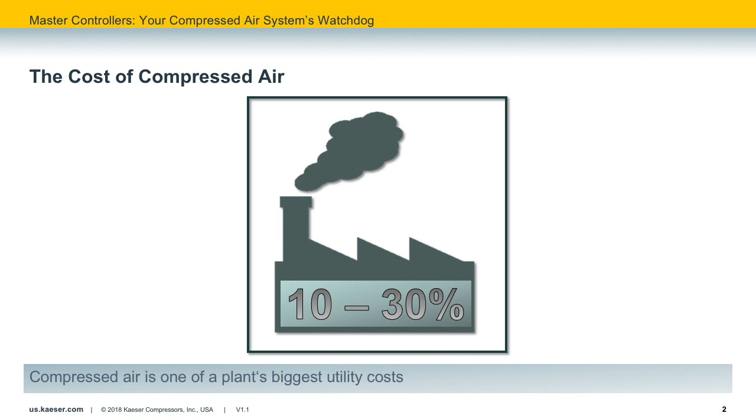The U.S. Department of Energy conducted a survey and determined that for a typical industrial facility, approximately 10% of the electricity consumed is for generating compressed air. For some facilities, this is as high as 30%. Compressed air is often a critical part of production, and without it, the plant may not be able to operate. So not only is compressed air expensive to produce, but it can also be very expensive for plants when their compressed air system is offline for any reason.

If compressed air is that expensive to generate and that critical, shouldn't it be carefully managed? Better yet, wouldn't it be best to have someone or something watching and monitoring it continually to ensure energy efficiency?

Today we'll talk about the problems that can happen when a typical compressed air system isn't properly controlled. We'll also talk about the benefits of a properly controlled system, as well as how a master controller functions, how a master controller can impact system design, and finally, system design parameters you should be aware of.

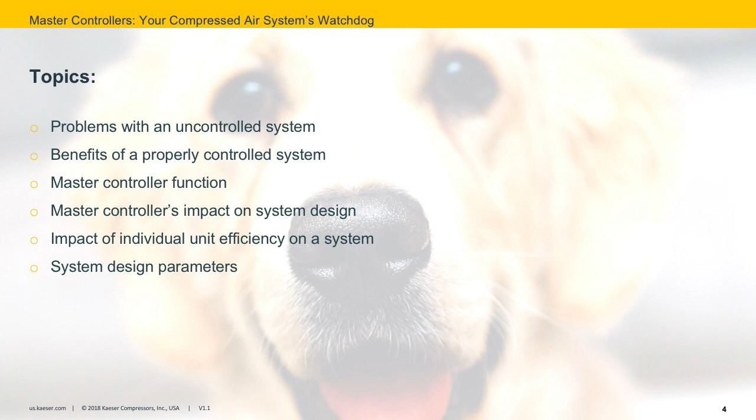In a typical plant, there are multiple units feeding the compressed air system. This can be a significant advantage, as with multiple compressors, there is the possibility for redundancy. If one compressor is offline, then a second or a third, and so on, can run to at least keep the plant in a productive mode. With only one compressor, if that unit is offline for any reason, the whole plant could be shut down.

The disadvantage of having multiple compressors operating the facility is how well are they operating together? Each compressor will have an individual controller or logic regarding its own operation, safety, startup, etc. However, how do these individual compressors talk to one another or play well with one another?

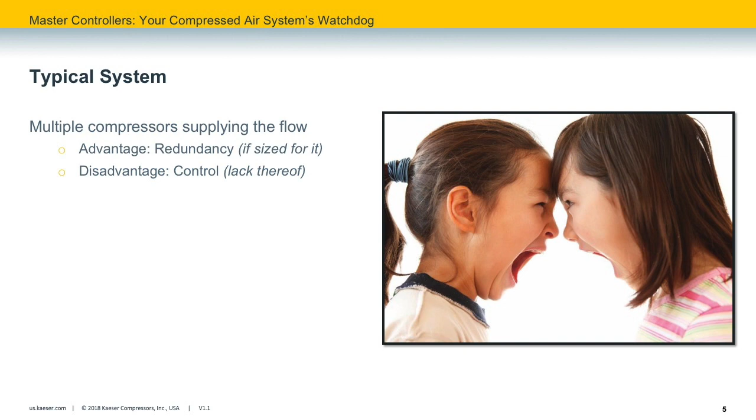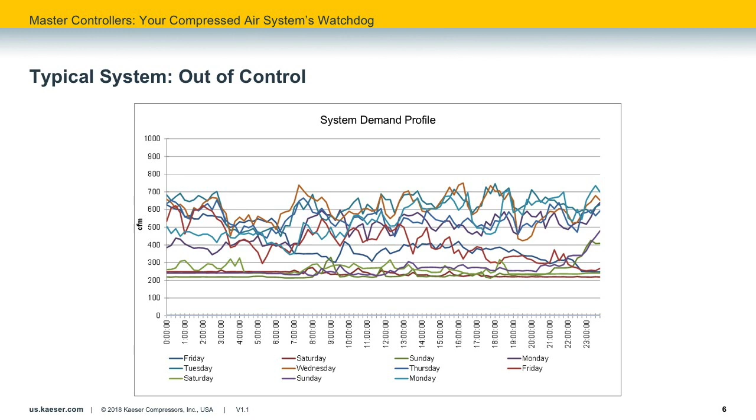On top of having multiple compressors supplying the flow, most systems don't have a steady airflow demand. Here's a typical example. This graphic doesn't necessarily mean the compressors aren't operating the system efficiently, but when you have various demands on varying shifts, how do you make sure that the most efficient compressors are actually operating? Without a master controller, there tends to be uncontrolled compressors cycling, trying to meet these demands, which creates excessive wear and tear on those particular units. In addition, this leads to unnecessary pressure drop in the system, which can further affect production.

Let's take a look at how a master controller affects a sample system. In this case, we've got two fixed-speed compressors, which are load-no-load compressors with a time-stop feature, and they're different horsepower as well. These are compressors A and B, shown off to the left. Compressor C is a variable speed, also called a variable frequency controlled compressor. Their individual flow profiles are shown in the left-hand graphic, all running independently of one another based on the input from the master controller.

When we combine all three compressor flows in the middle graphic, we see how the master controller chooses which compressor to run. This is actually based on the operating pressure in the dry storage receiver, which is the third graphic, called the storage vessel. In most cases, a master controller will be adaptive and load and unload compressors based on activity in the facility, which affects operating pressure at this dry tank.

Taken together, we get the total demand, which is the last graphic on the right. Notice the relatively stable operating pressure at the storage vessel graphic, but the varying flow profile in the total demand graphic. So that's what we would expect with a master controller: stable operating pressure with a fluctuating demand, and all the machines operating very efficiently.

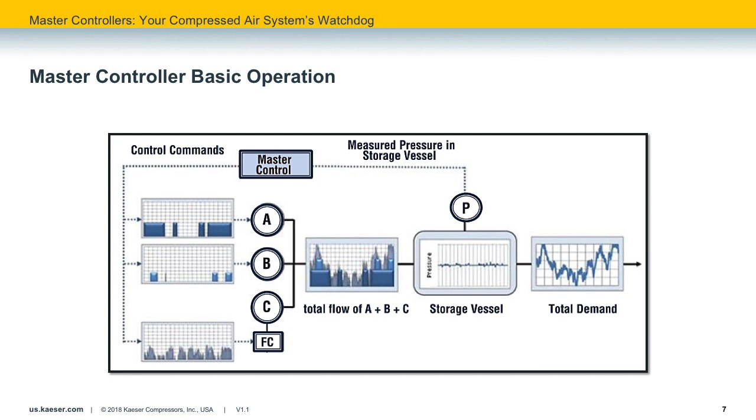We've talked a little bit about varying demand, as well as a breakdown of system operation with a master controller, but to really appreciate where we've come now in 2018, we should really look at where we've been.

Prior to master controllers, and even today without a master controller, cascading pressure bands with multiple compressors is still an accepted practice. The end goal of cascading pressure bands is to ensure that all of the compressors don't load or start at the same time. If that happens, your plant could have a huge demand spike or charge on your energy bill each month. By introducing a sequencer to cascade your compressors, it can regularly change which compressor is first on, last on, etc.

So therefore, you can start to balance the load hours. In the end, because of this larger pressure band, this allows the baseline compressor to run at an elevated pressure, which increases overall energy costs, which we'll get to in a little bit.

Notice that the overall pressure is almost a 15 psi swing, and this is just at the control point. It could be even larger downstream in your facility. And really a 15-pound band with 4 compressors is probably a little bit light. I would expect to see that maybe more like 20, maybe even 25. Also note that the red line at the bottom represents the minimum acceptable pressure in the plant.

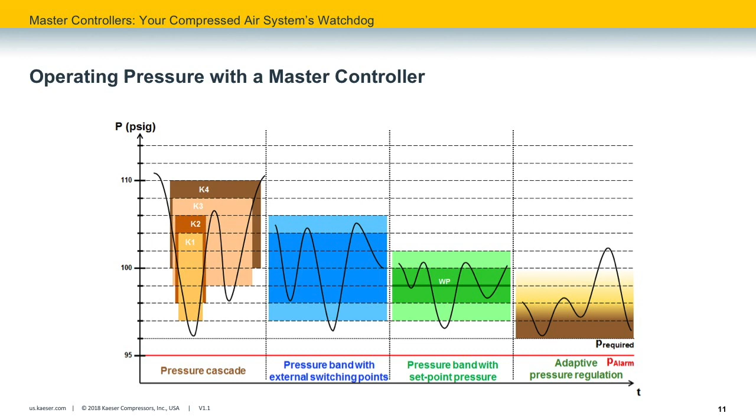With these type of master controllers with adaptive pressure regulation, the master is looking to, number one, meet the fluctuating demands while maintaining critical pressure, but also, two, obtain the maximum efficiency of the system. In some cases, during low production periods, it can be more efficient to allow the pressure band to widen. So that's what we see at the right-hand side where the pressure comes all the way up, thereby cycling those compressors on the off shift a lot less than it would be to maintain a lower plant pressure. So there's a benefit between pressure and also cycling, which we'll talk about a little further.

So far, we've discussed the first two items, improved pressure stability and also increased system efficiency. If you can recall the slide with the two children screaming at each other, then you'll understand the reduced maintenance cost and enhanced preventative maintenance topics. Additionally, the benefits for a master controller include minimized waste as well as the master controller's IoT capabilities.

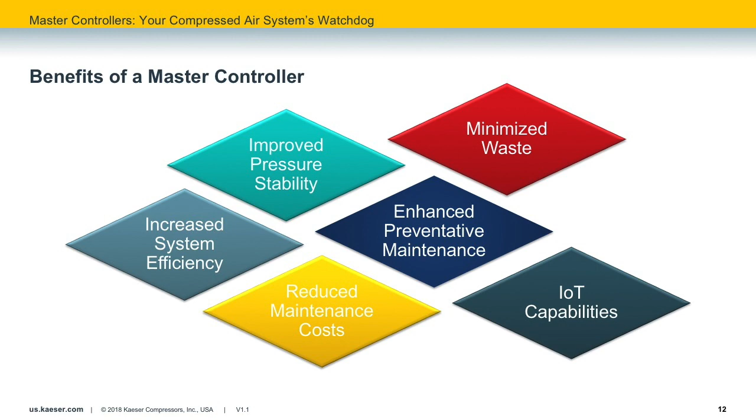So let's break it down a little further for each of these points. Remember, we looked at cascade pressure control, which had as high as a 15-pound pressure band, and if you'll remember, I said it could even be higher depending on how many machines you have. Many pieces of equipment require a stable operating pressure at the point of use, and this can be accomplished via local filter regulator and lubricators, also known as FRLs.

However, if these lines aren't regulated and pressure is too high or too low for a particular piece of equipment, the product quality could suffer, or this could increase product scrap. Further, maintaining a lower, stable operating pressure reduces compressed air waste, which we'll talk about on the next slide.

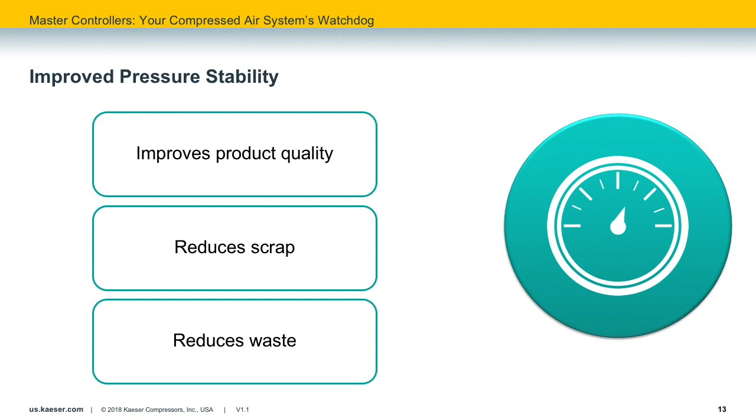In most compressed air seminars, you'll hear a reference to the Department of Energy's review of compressed air systems. Specifically, 45 to 60% of all compressed air generated is used for production, but the remainder is wasted energy. So how do you curtail these wasted energy items?

By reducing plant pressure, that's the easiest way to do it. This can be accomplished with a master controller. The major factors of waste are artificial demand and leaks, which are directly affected by pressure. Inefficient or inappropriate uses are not affected by pressure, so that's the other factor of waste.

By reducing plant pressure, the amount of air being used is going to be reduced. At elevated pressures, all your demands are going to use more air, so leaks are going to leak more at higher pressures than they are at lower pressures. Drop the pressure, and your leak will leak less.

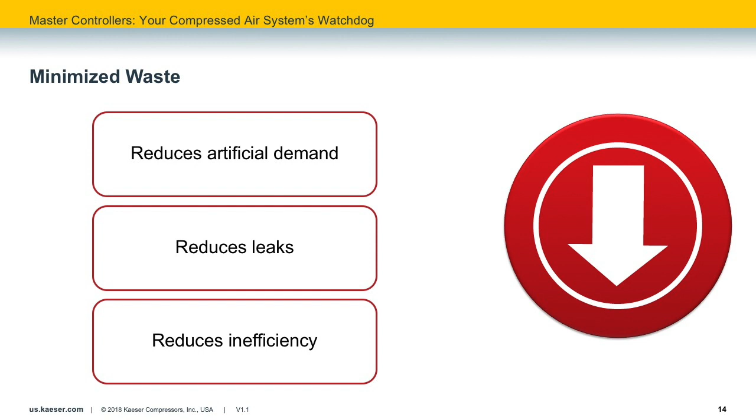That's artificial demand. We'll talk a little bit more about the monitoring functionality of a master controller later, but monitoring flows over time can also help you get a handle on your plant's leak rate. Finally, a master controller can reduce system efficiency, which thereby reduces wasted energy in your plant. I said reduce system efficiency, but it's more like improve your system efficiency, so less waste.

If you've purchased a compressor, you might have heard that over 70% of the life cycle cost of a compressor is going to be energy. The balance, which is purchase price and maintenance costs, those are evenly split.

Understandably, you'd choose the most efficient compressor, but what if you had older compressors in your system? How can you maximize system efficiency?

A master controller should minimize the number of cycling compressors in your system. Typically, there should only be one of these compressors. This allows for other larger compressors to run fully loaded for longer, maximizing your compressor duty cycle.

Ideally, baseload compressors should have close to 100% duty cycle, meaning there is little to no time spent idling, which would be producing no compressed air to the plant, but your motor is actually running.

Further, as hinted in the last slide, reducing plant pressure to the lowest point possible will not only reduce your artificial demands, but also reduce the compressor generation pressure, which reduces overall energy cost.

One of the rules of thumb that we like to talk about in the industry is for every 2 psi pressure drop, it's equivalent to a 1% energy reduction. This is also the case if you say 1 psi is worth 0.5% in your energy cost.

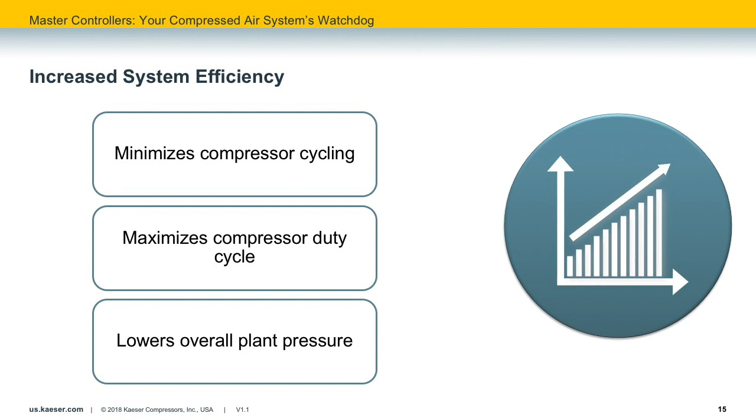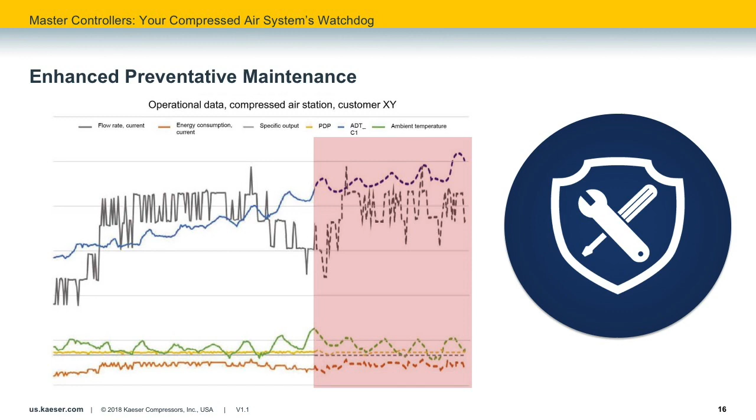Internal compressor controllers have enhanced capabilities, but we're asking them to do more and more with each new iteration of compressors. A master controller should have the adaptive pressure control like we discussed previously, but in the near future could have the ability to note potential service issues based on real-time data like we're seeing here.

This is one of my favorite slides. I'm often asked, what's the most important data point to measure in a compressed air system? Well, most of us aren't measuring anything. And when there's a problem in the system, we'll address it immediately. So we're reactive rather than preventative, like we talked about in the last slide.

So how do we become preventative? We've got to measure the system and interpret that data.

These are just some of the items that I'd recommend monitoring: alarms, general compressor operation, system pressure, and that's just system data. What we found is the reporting feature from a master controller showing system efficiency and system operation are really powerful tools for plant engineers and plant managers to associate compressed air to your cost of production.

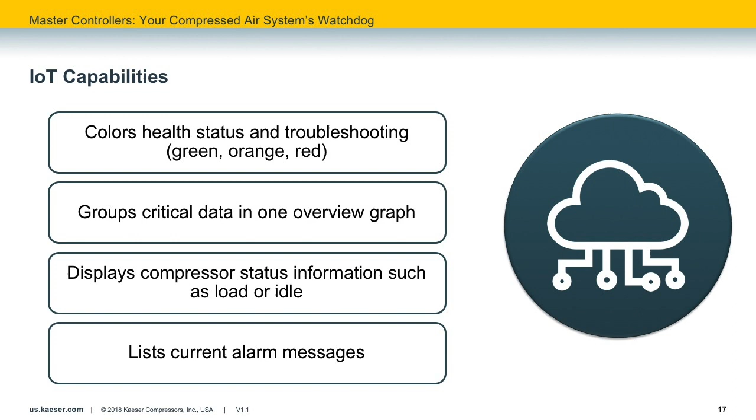Without a master, we can have multiple compressors fighting each other, loading and unloading often based on other compressors' operation, so machines fighting each other. This increases maintenance costs of all your compressors. Plus, without a master, you can have additional compressors online for no reason, simply idling. We talked about that a little before.

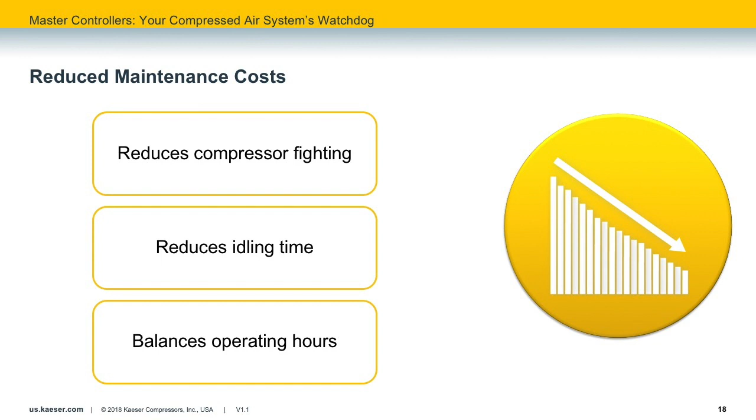This is going to increase your maintenance costs because maintenance costs are based on service hours. Introducing a master to the system can balance the service hours on like-sized compressors, which can allow your compressors to be put on the same service schedule, or eliminate machines that are online when unnecessary. So that's a big boon and can save trip charges as well.

That lifetime is anywhere from 5 to 10 years. I've been in the compressed air industry about 14 years now, and I continue to see equipment that's been installed for 10, 15, 20, even 30 years. So those lifetimes are different depending on what your considerations are. Also, if that solution offers you no redundancy and you can't afford downtime, it could cost you dearly if there's any kind of repair. So those are things you need to look at when you're designing or redesigning a system.

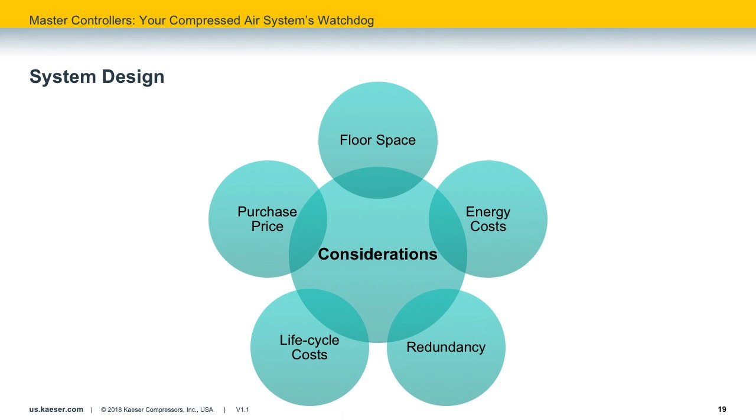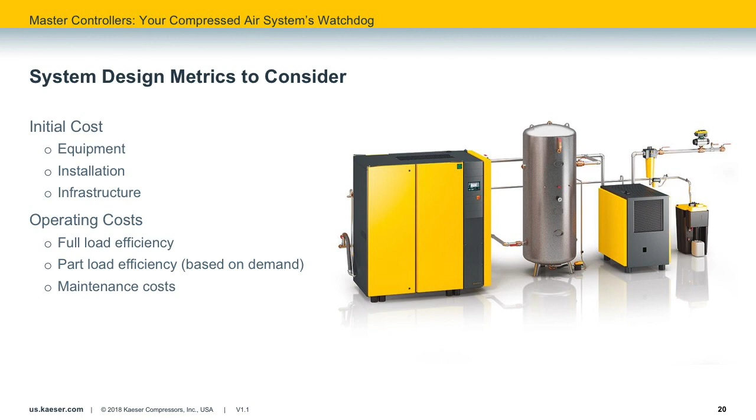So how do you compare various systems? And then what's the best way to design a system?

Let's first look at an installation with a single compressor. Many facilities consider one compressor for operation, and that's still common today for sure. In this example, we're talking about a single fixed speed compressor, which has a lower capital cost compared with a single variable speed driven, or VSD, compressor—often referred to as a variable frequency drive compressor, depending on the manufacturer. Single compressor installations are typically the lowest capital cost compared with multiple compressor installations, and that's pretty advantageous, especially when you're working within a budget.

However, one thing that always comes up in any system design is the cost of backup or redundancy. In everyday life we say don't put all your eggs in one basket. I know it's cliche, but it's the same with your compressed air system. In most cases, two eggs are better than one in case one breaks down. With a single system design, the cost of a backup compressor is equal to that single compressor. So those are things you have to think about—if your compressor is $50,000 and you want a backup, that's another $50,000 procurement.

But if you had a split system, it would be less. Further, comparing a single fixed speed compressor to a single VSD compressor, the VSD compressor is going to have a higher overall purchase price.

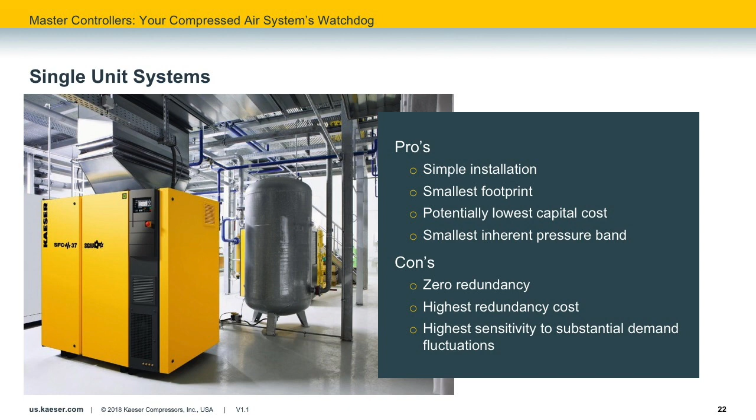A simple alternative to the single compressor station is to consider 2 fixed speed compressors, each rated for 50% of the demand. Notice the pressure band increases slightly so that we could cascade the units, so both units aren't loading and unloading together. Remember that graphic we looked at originally with the pressure bands?

This can be accomplished a multitude of ways, either via pressure settings on each machine to master-slave between the 2 compressors, or via a master controller. Again, with the master, you can get down to probably about 7 psi.

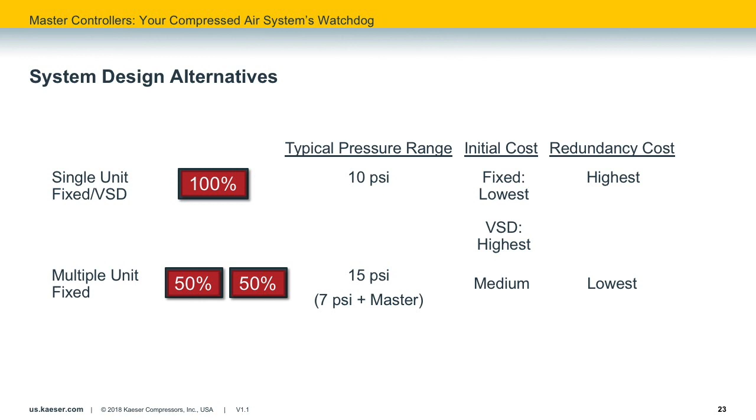While the capital cost for a multiple compressor system is going to be higher than a single compressor, instead of adding a 100% compressor for redundancy, we can consider a third 50% compressor as backup. So overall, that purchase price could come down. Therefore, redundancy is going to be a lower capital cost to add.

The big benefits of the multi-fixed speed compressors is, again, that lower cost of adding redundancy. This also provides better efficiency at lower demands than a single fixed speed compressor. You'll see that in some graphics later on as we get to it.

Depending on the control range of the single variable speed drive compressor, it could have a comparable efficiency at those lower demands as well. Maintenance intervals, again, are traditionally based on service hours of the compressors.

Therefore, if we have multiple smaller fixed speed units, we can stretch out the operation, balancing the service hours between all the compressors. This typically results in more predictable service intervals, with all 3 compressors, or as many as you have there, coming due at the same time, saving multiple trips.

Like we already talked about with a master controller, balancing service hours can go a long way in saving the plant on maintenance costs. The multiple fixed speed compressor installation will typically require more physical space at your facility.

It'll need more utilities, power, water, etc., if you have water-cooled machines, and infrastructure, piping. With more compressors, the overall project will typically cost more.

This scenario also has a higher potential pressure band, again, due to that cascading of the compressors. Our example was 15 pounds.

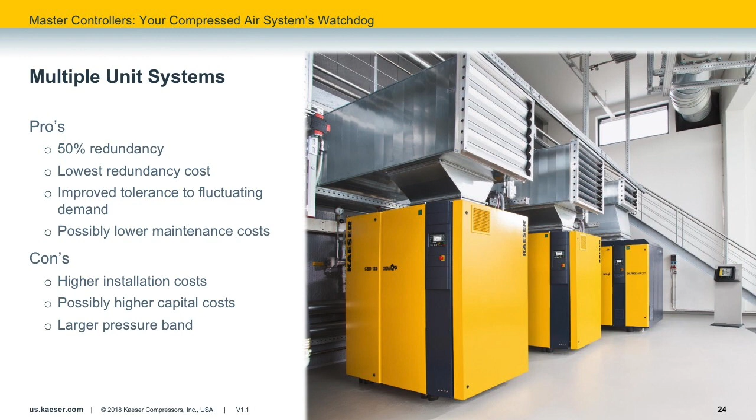Lastly, we'll look at a split system with a variable speed drive compressor. This is representing about 60% of the overall demand, and it also has a smaller fixed speed compressor, which is representing about 40% of the overall demand.

The pressure range is again about 15 psi, to ensure that both compressors aren't loading and unloading together, which of course would defeat the purpose of having multiple compressors handling the demand.

This is going to require a slightly larger fixed speed compressor as backup, so redundancy, hence the medium redundancy cost designation. You'll also be looking at a medium installation cost designation, as variable speed compressors are, again, more expensive than their fixed speed counterparts.

By adding a master controller here, you can further reduce that pressure band. Additionally, a master controller will ensure that the VSD always runs as the trim, and that the most efficient compressor, or combination thereof, will be operating at any given time. So again, a great opportunity for a master controller there.

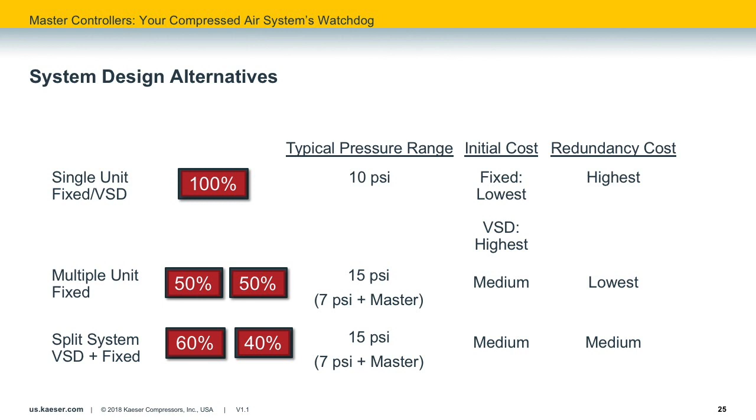The goal of any system design is to maintain the best possible efficiency over the entire demand range. We often see facilities scale up or down quickly without the ability to procure new compressors. Facilities sized in a stepwise or split system design are able to maintain their efficiency levels closely regardless of demand, especially when they already have a master controller.

One large variable frequency drive can have a huge control range, but at lower flows the efficiency level is reduced. If the single variable speed compressor spends significant time at that low level, energy savings could be significantly reduced, and you could see increased maintenance costs, unexpected downtime, and shorter lifetimes of your variable speed unit.

Additionally, systems with a master controller can provide necessary monitoring and reporting, remember that IoT we just talked about, as well as operate your station as efficiently as your design allows, therefore reducing your energy costs, waste, and stabilizing your operating pressure.

We'll spend a little time discussing control range next, but when using the split system design, sizing the VFD/VSD compressor at 60% of the demand and the fixed speed compressor at about 40% of the demand will fit within the VSD's control range.

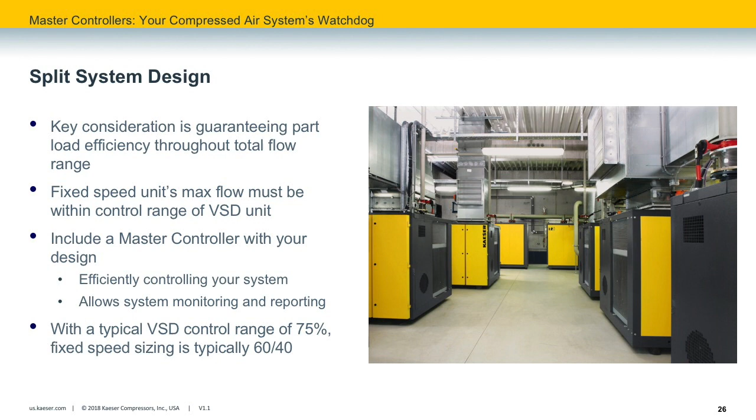So we'll talk about control range here. In this example, we take a 1,450 CFM VSD compressor. It's got a minimum flow of 625 CFM, which is only a 43% turndown. It varies based on the machine, how far you can go. In a lot of cases, you're down to 22, 25%. In this case, it's only 43.

Below 625 CFM, the VSD compressor is going to run load and unload, which will be less efficient, and it's going to generate a fluctuating pressure, which you shouldn't see with a VSD in the first place.

Also, if there was a same size fixed speed compressor, again 1,450 CFM in the plant, what happens when the plant needs more air than the VFD or VSD can supply? So if we needed 1,451 CFM, but we're only supplying 1,450 CFM, that same size fixed speed compressor is going to have to load. So you'll have another 1,450 CFM online for just one additional CFM. You're increasing your supply significantly.

So the system is going to hit the unload pressure of both machines typically really quickly. Usually in this scenario, we see both the VSD ramp up and down at the same time the fixed speed compressor is loading and unloading. This can occur all the way until the demand exceeds the VSD's minimum speed, in this case 625 CFM, plus the fixed speed's rated output, which is that 1,450 CFM.

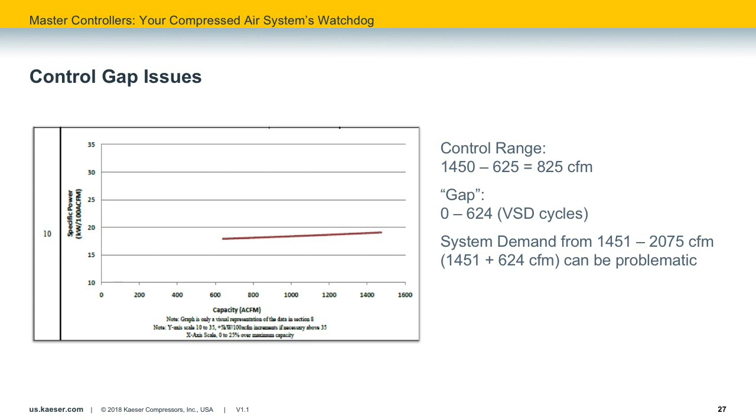A split system design will typically be the most efficient at all demands, and it can provide for redundancy should the VSD be offline for any reason. It's typically going to be a lower capital cost than a single VSD system, just based on horsepower. Alternatively, the split system design will have a higher capital cost than a 100% fixed speed compressor, or perhaps multi-unit fixed speed compressors. And the cost of redundancy with the split system design is going to be higher than a multi-unit fixed speed compressor, but lower than a single VSD.

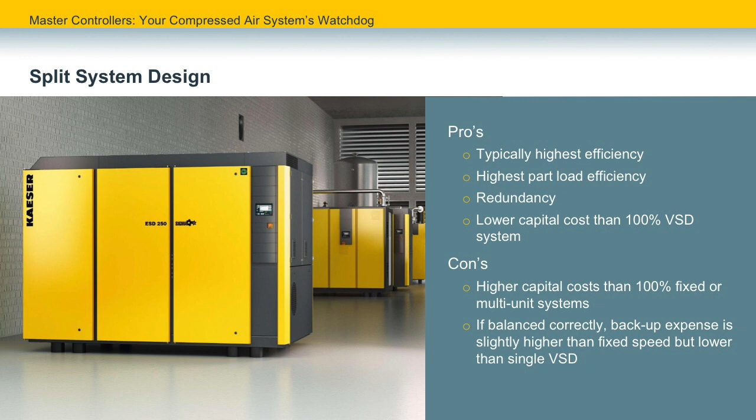Now that we've talked about the pros and cons of various station designs, let's talk about how multiple compressor systems can be even more efficient. These are items we've already discussed, but we'll highlight them once more.

We've mentioned the cascade pressure band. This is going to result in higher average pressures, which results in higher operating costs. Remember, 1 psi is equal to about 0.5% more input power. This also results in higher artificial demand, so your leaks will leak more at higher pressures, and your tools will use more air. Roughly translated, 1 psi equals about a 1% increase in demand of all unregulated uses.

Not only that, but remember that control range discussion with same size VSD and fixed speed compressors? This typically happens with multiple compressor rooms that lack any external controls. The compressor internal controls drift over time, and the units start to load and unload much closer than intended, and you may now have two compressors cycling in two different rooms versus just one. Obviously not what you'd want. That significantly increases power consumption and will also affect the lifetime of the compressors from a wear and tear standpoint.

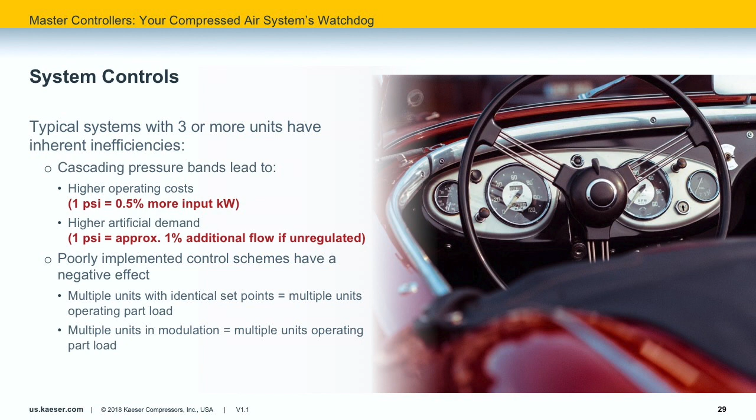Flow controllers are a useful tool in the field to drop the network pressure to the lowest possible level. By doing so, this addresses the artificial demand issue, because now you're regulating to the distribution piping if you have unregulated uses. So instead of having 110 psi, you might have 90 psi or 80 psi, because the flow controller is going to regulate pressure to that distribution piping.

In systems where there are or were multiple modulating compressors, a flow controller was a great way to reduce overall energy consumption. However, often the generation pressure, at the compressor discharge, must remain at a higher level to create needed buffer for the flow controller to actually work. Typically, that's about 5 to 10% of the inlet pressure. The flow controller doesn't control the compressors at all, only that downstream pressure. So we aren't capitalizing on improved energy efficiency of the compressors.

Now, there are cases where a flow controller can work really well with that needed storage buffer. So if you have high intermittent demand events that would take the entire system down, or would turn on a third, fourth, or fifth compressor, by having a large storage volume and operating at a higher pressure, then using the flow controller to deplete that storage volume, you can keep off that third, fourth, or fifth compressor, which can really save you significantly on demand charges. However, you're still going to pay for the generation charges to create that storage volume.

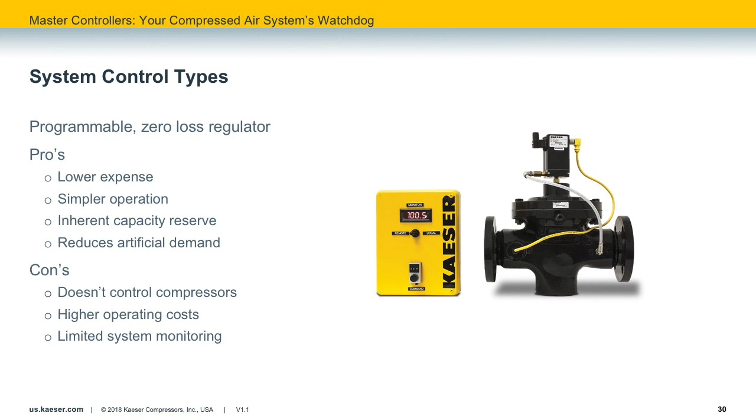With a cascade pressure already established for our three examples and the needed reserve buffer in a storage receiver, plus a little bit of differential for the flow controller itself of at least 2 to 3 psi, which will vary by manufacturer, we have a total differential pressure from the compressor discharge to after the flow controller of between 17 and 28 psi.

Wow, just incredible to look at that number. That's a very large pressure swing to consider.

So is the downstream pressure set point of the flow controller low enough that we can effectively run the flow controller and not overpressurize the compressor? So that's a big question.

So what addresses some of the misgivings of flow controllers? And before we move on, I'd like to say that there are some really good applications for flow controllers. If you're trying to build a buffer, keep some of your machines offline until you have a big demand event, then a flow controller can be a great thing. And like we say here, if you can handle the larger pressure band and the larger generation pressures, maybe keeping compressors off is the way to go. But in most cases,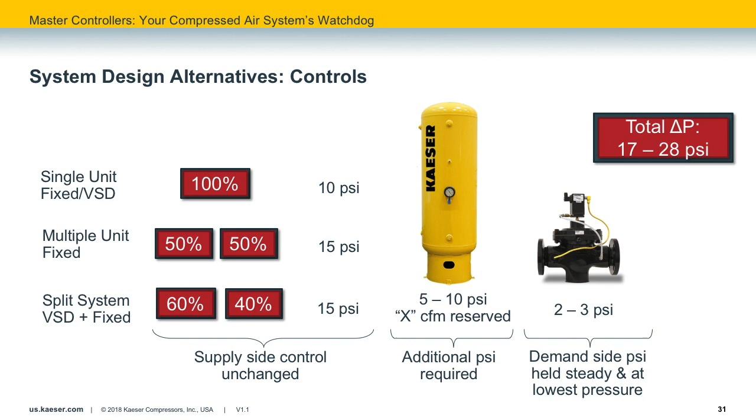we won't see that. So as discussed before, a master controller can address some of these issues, and it's going to be able to coordinate all your compressors within the system. Newer master controllers on the market are based on algorithms that consider rate of change calculations versus simple pressure band controls. So it's learning the stations and making simulations for the most efficient operation.

When a master controller is installed and there are multiple smaller compressors, efficiency can be optimized, resulting in lower operating costs. Master controllers also can be accessible remotely and stream data and messages to plant operators in real time, which brings us back to that IoT or Industry 4.0.

When compared to flow controllers, master controllers are generally more expensive and can have significant installation costs. And they don't have explicit reserve capacity like a flow controller creates. So those are some pros and cons and comparisons.

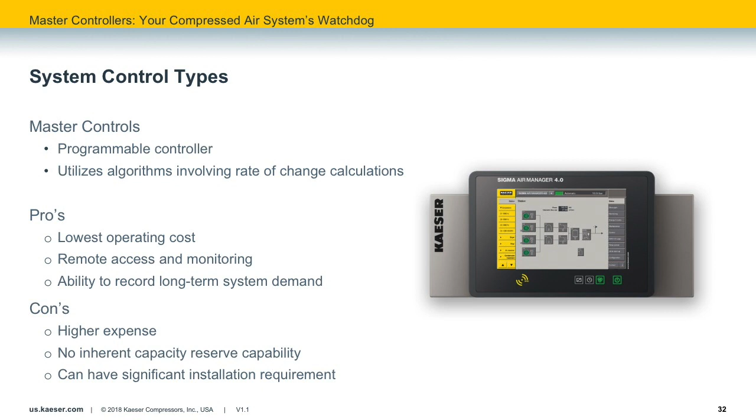However, rather than that total of, remember what we showed, 17 to 28 psi possible, a master controller is typically going to work with a 3 to 7 psi range, and that can vary depending on what machines you have, depending on how much storage you have, and so on.

Could be larger than 3 to 7, again depending on increasing the pressure. Remember, anytime we're increasing the pressure, we're increasing the generation cost. Every 1 psi is equal to 0.5% in energy increase or likewise decrease. So it's better to supply your airflow at the lowest possible pressure, which is going to allow your compressors to turn off and shut down, saving energy. You'll see that with your master controller by managing your machines. The other large benefit of a master controller is having everything on one pressure band so that you're not fighting one another. That's how we're able to accomplish that 3 to 7 psi.

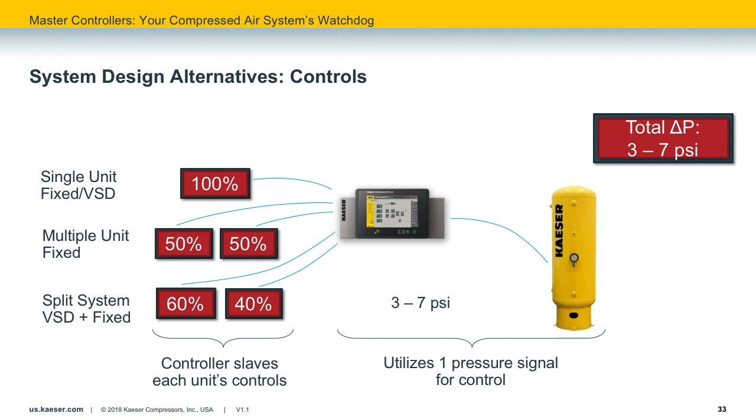Getting back to the sample systems we talked about: single VFD, single fixed, multiple fixed speed units, and then the split solution, 60% to 40% VFD to fixed. We'll give some real-life examples here with one 250 horsepower VFD, one 250 horsepower dual control or fixed speed machine, which is a load/no-load compressor with a timed-stop feature, and then two 125 horsepower dual control or fixed speed compressors. We'll refer to that as a split solution, as well as one 125 horsepower VFD and one 100 horsepower dual control or fixed speed, again referred to as a split solution.

So how do they compare efficiency-wise over the course of a typical demand profile?

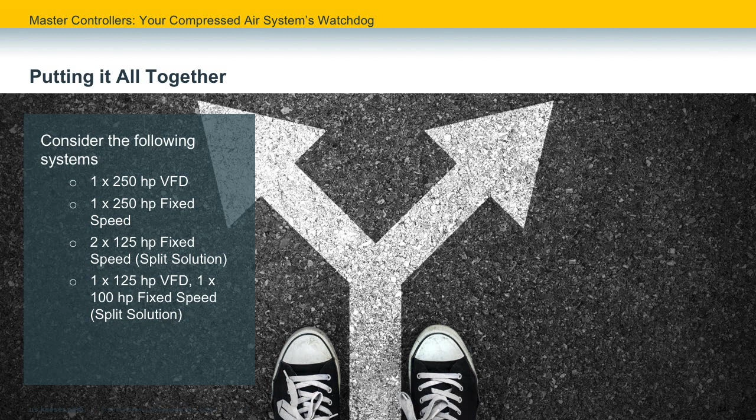Remember, we talked about budgetary numbers. Budget was really important. We want one machine - that's the only thing we have available. Well, if you run really 60% or below, you could be really wasting energy. Not only that, but it's an application-related issue, and you can have service issues down the road. So that lifetime we talked about, is it 10 years? Is it 5 years? You're probably looking at a lower lifetime as well. But at the higher level, if your single machine is going to run at those higher levels, anywhere above 600, the single fixed speed compressor is becoming more efficient.

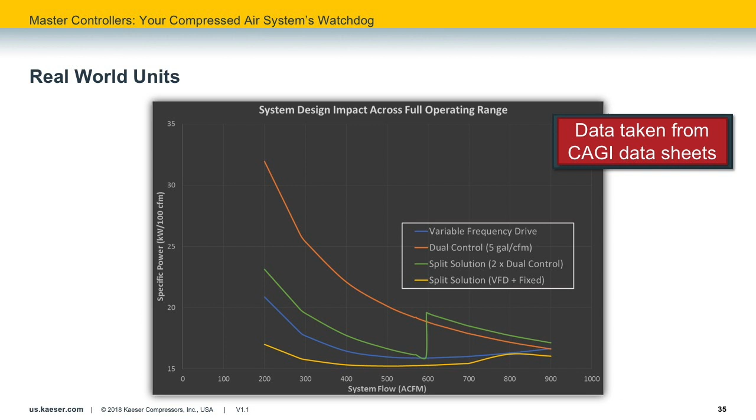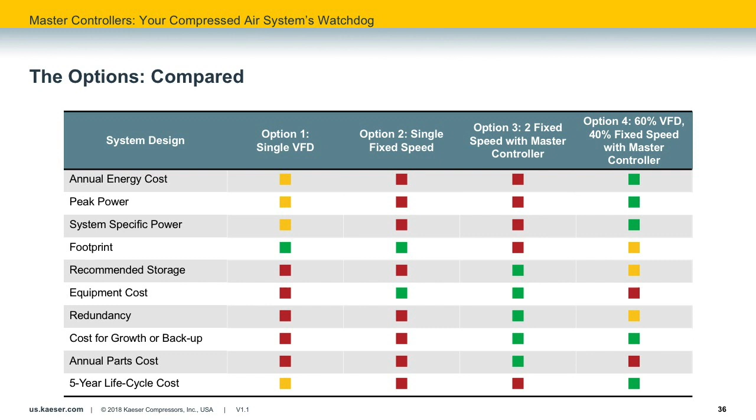The main items to consider when procuring a new compressed air system are efficiency, capital, reliability, and footprint. We looked at the efficiency graphic on the previous slides. Single fixed speed, generally speaking, is least favorable over the whole range. The multi-unit fixed option is much more efficient, but not necessarily at the higher end.

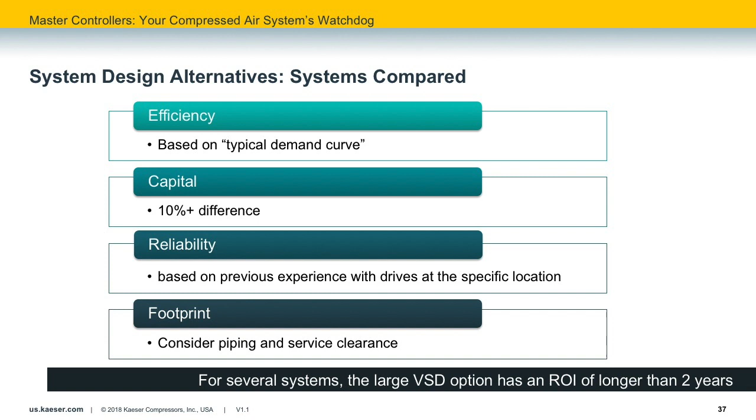Whereas with split systems, we have an opportunity to at least meet some production. Also, consider the ROI between each of your options. Note reliability: VSDs are pervasive now in the industry, and many facilities are dusty and dirty environments which can really adversely affect the drive, meaning a catastrophic failure. Also, bad power can have a more prevalent effect on a VSD than a fixed speed unit. Therefore, these ancillary issues can also affect the decision on whether to install a VSD unit, either in a single or in a multi-unit application.

Is there a right answer? Honestly, it's going to vary based on each use case. In the end, all manufacturers can provide multi-compressor solutions with a master controller, and they should. As mentioned earlier, many facilities only consider capital cost, and if the capital cost only allows for one compressor, then that's the answer. Again, this is going to traditionally be less efficient, especially for varying demands, especially with demands that are less than 60% of that unit's capability, more than any other option we considered.

And this is going to lead to a lower lifetime of the equipment based on constant cycling. Most systems don't have sufficient storage in the compressor room either, so that'll also take its effect. So really, don't assume anything. Find out.

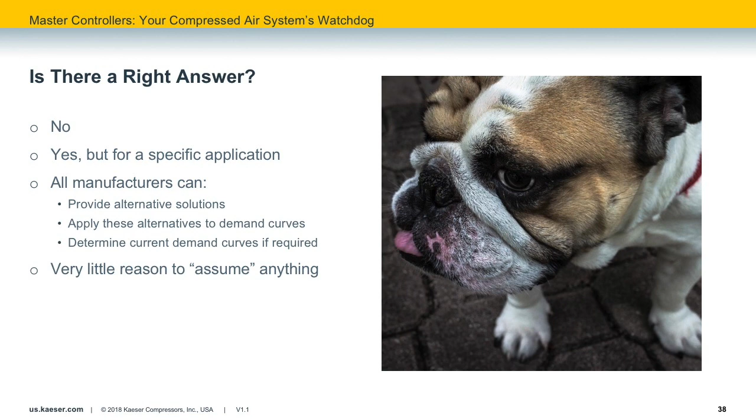How do you find out? Take a demand profile of your system through a compressed air audit, or trend the data that you're already recording, and design your system, or tweak your system based on this information and any perceived changes expected throughout the lifetime of your equipment.

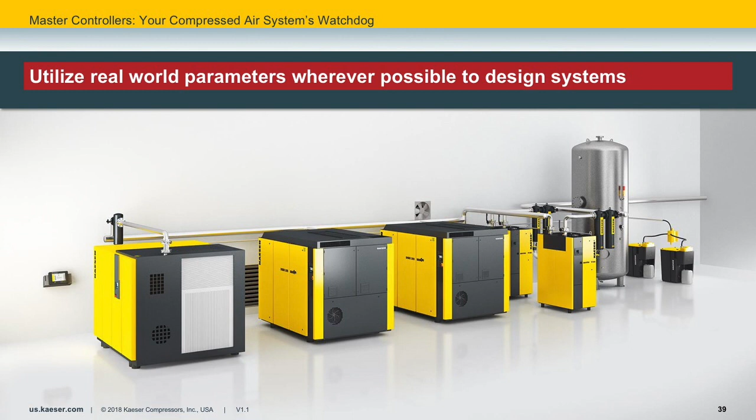Planning for tomorrow, today, can set your facility up for continued success. This can really be easily done with a master controller, if the master controller is already installed in your system.